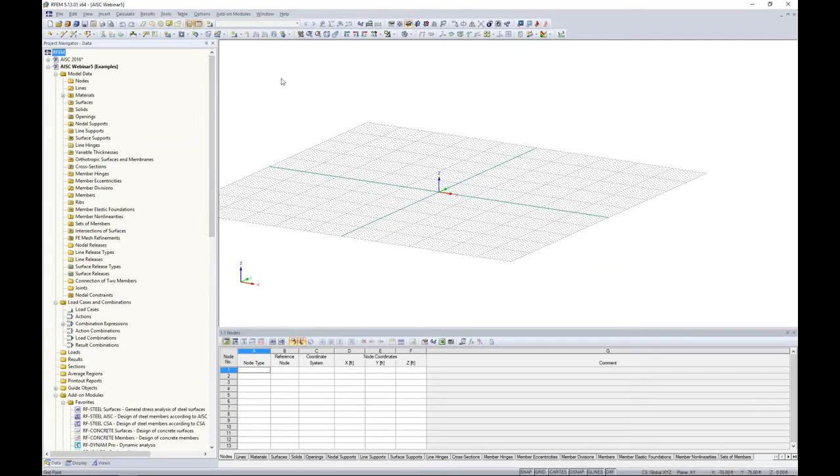So to begin with, we want to start off with drawing a truss. Now, we could normally go in and create our members individually, snapping to different points, but under Tools, Generate Model Members, we have several structure generators here: 2D frames, 2D trusses, 3D frames and trusses. We can even generate stairs. So we'll start off with a 2D truss.

And up pops our dialog box, and you'll notice that we have many different options when it comes to truss design. In addition, you can specify how the diagonals will be laid out, or our web members. So if we take a look at some of these different options, they will go ahead and update depending on which selection we've checked here. So we'll start off with this second selection, and our diagonals will be the default for this first selection.

The parameters is just our geometric information. The number of bays, we can set this as 6. The total length, which would be the span length, we'll set this as 50 feet. The total height is going to be measured right here at the center line. That can be set to 7 feet.

Now we have a couple other options here. We can lower the lower chord member here by a certain distance. For example, if we set this to 10 feet, you'll notice how this picture changes. Same goes for elevation. If we make some changes here, then our picture is updated for how our truss will be generated. So moving on, the cross sections and member types.

So we must define the cross sections for our chords, both upper and lower, as well as our diagonals and verticals, or our web members. The program's telling us that we need to create a new cross section. So for this, we will open up our cross section library. You can see here that we have many different cross sections. For today, we'll begin with the rolled sections, and in particular the HSS.

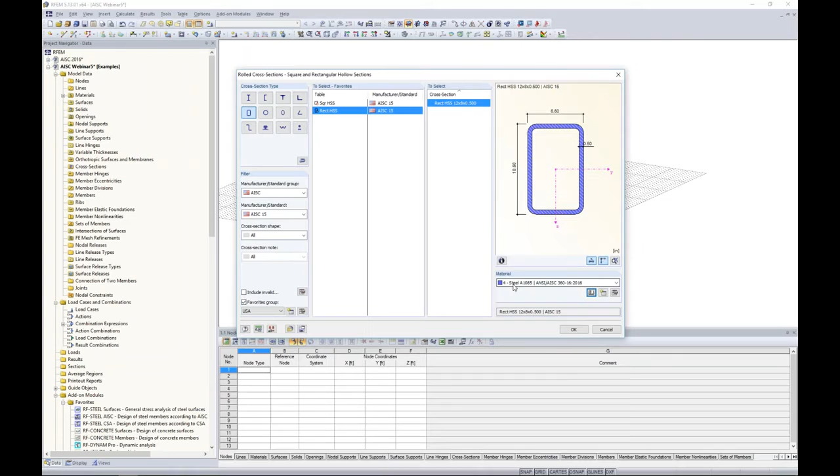So once I've created this material, I can choose it from my selection box here. We click OK, and we click OK once again. Now, that same material and cross section is populated for all of my members. Well, for the diagonals and verticals, I actually want to create a new cross section type, again under HSS, under my favorites group USA, and this time I want to choose a square HSS 5 by 5 by 0.375.

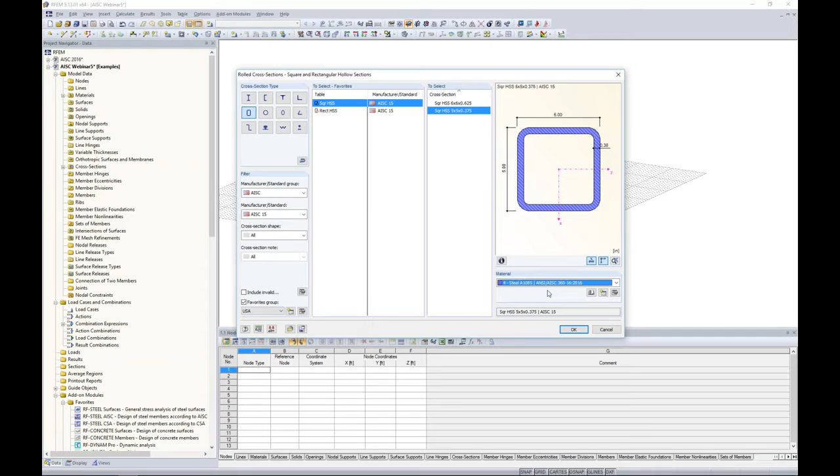I want to choose steel A1085 for my dropdown. You can see I accidentally entered it in twice here, no problem. We'll select the fourth material here, 1085. That will always be available now when I go to draw a new member because I've defined that material within this particular file. And I click OK.

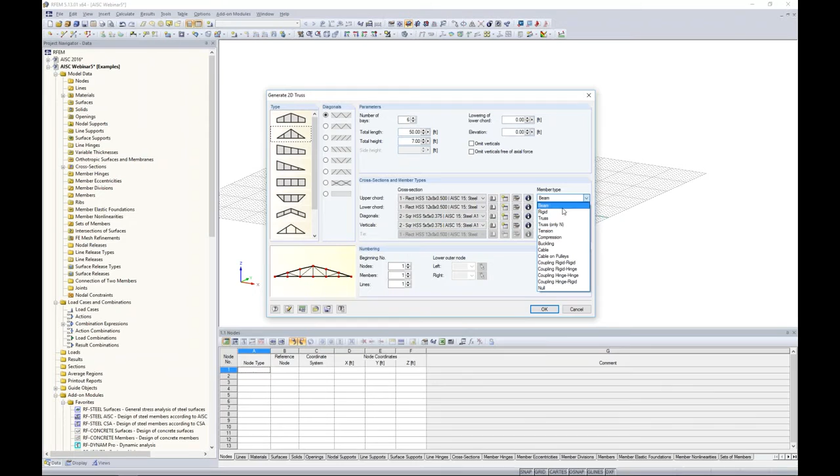For the verticals, we've already defined the 5 by 5, so now I can choose it from my drop-down box here as well. Regarding the member type, this is important because you can see here that we have many different members within RFEM. You can choose a beam member, a rigid, tension only, compression only, cables, because we are a nonlinear analysis program. So a beam member is going to be nothing special, just a typical beam or column.

But a truss member, which you can see the program automatically inputs here, is going to set a moment end release. So we're only transferring axial and shear forces. So that's just a quick application rather than manually applying those moment releases for our web members here. So once we're done, we can click OK.

And you'll notice that, as I said, our input material is listed here. The blue is what we're not using. So I input steel A1085 twice. All I need to do is to select that, hit the delete key, and now we only have one listing of 1085.

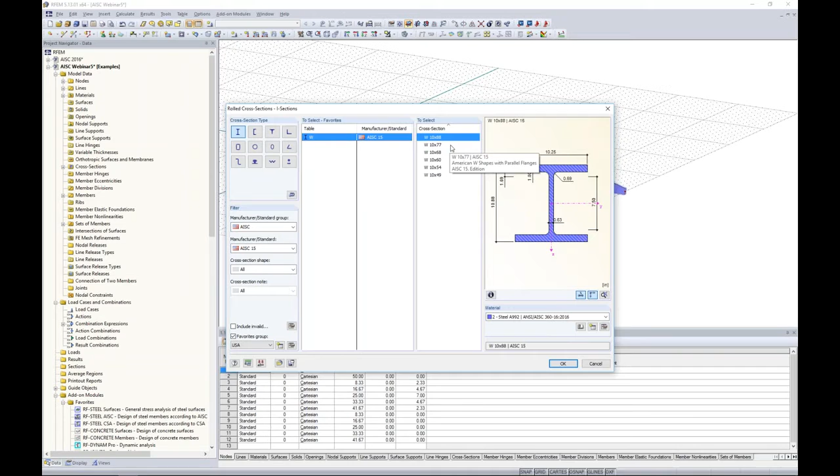Okay, so moving on to the columns, I'd like to just draw a member as we would within our toolbar, a new single member. I want to define a new cross-section type, and I'm going to choose my rolled hot sections, but a W shape here. And activating my favorites group down here with my checkbox, I've added in some W10 by members. So maybe I'm not totally sure which 10 by member I want to go with yet, so I'm going to select one of these sections from my favorites group. We'll start off with a 10 by 88.

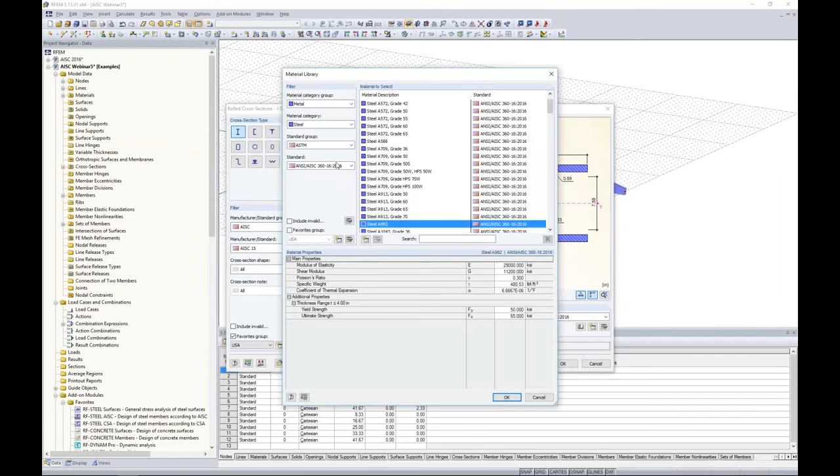Now, STEEL A992 is one of the defaults within the program. Currently it's set to the 2010 standard. At some point when the 2016 is more widely used, we'll transition to the 2016 STEEL A992 to be default. But for now, if you'd like, you can utilize this just for consistency to change this from the 2010 to the 2016. So STEEL A992, we'll click OK. The member hinges, we'll leave these as fully fixed. We'll see a little bit later on how to apply a moment end release.

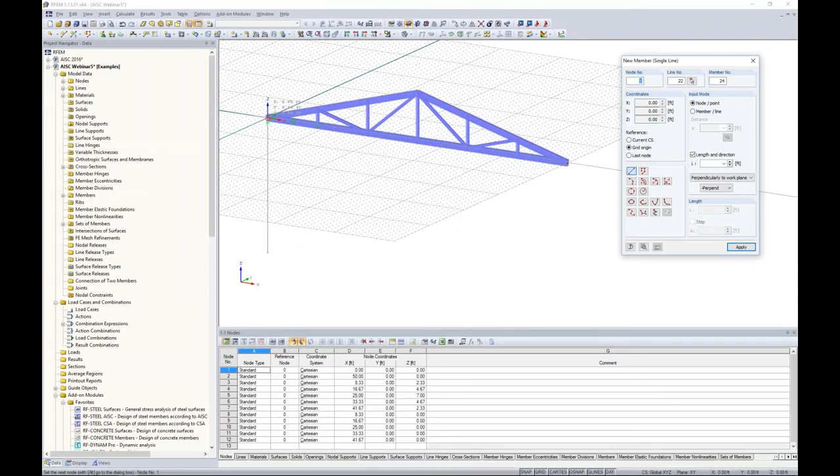I click OK. Now, typically, I could snap from one point to the other to create my columns, but we have a nice feature here where all I need to do is specify the length and direction. So I'm going to specify my columns at 20 feet in height, and I want to draw this column member perpendicular to my current work plane, which you can see here in the negative direction. So now when I just snap to the end nodes of my truss, I hit my right mouse key to escape, you can see that those columns were automatically drawn in the right magnitude and direction.

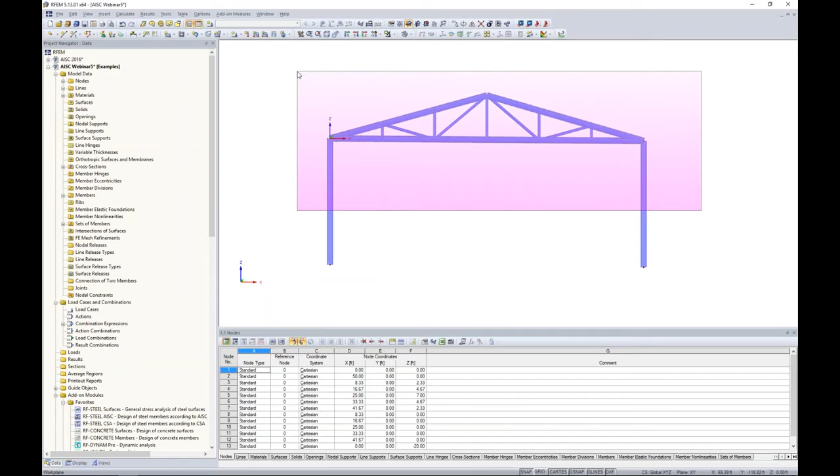Okay, so now that we have our first frame and truss drawn here, I'm going to use my selection box, and you'll notice that I'm paying careful attention to not select my nodes down at the bottom, and there's a reason for this. So just like in AutoCAD, with this selection box, we drag it over our frame, and I'm going to turn this into wireframe view and zoom in here. Holding down my control key, I'm going to unselect a couple of these nodes at either panel point on either side of the truss. Now you can't really tell graphically, but again, there's a reason why I'm doing that.

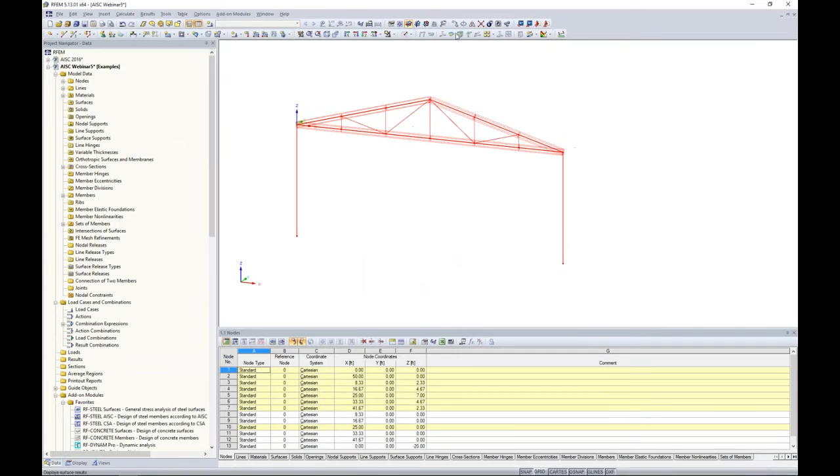So we're going to move on to the Move Copy tool. We're going to create 3 copies in the global Y direction of 20 feet. So Move Copy, nothing too special here. But under this option, Edit Expanded Settings, if we take a look at this, we can actually create lines between copied nodes. So this is why I was careful to highlight some nodes and not others. Now, even more so, we can assign a cross-section to those copied lines, or in other words, we're going to create members between the copied nodes.

Now, if you want to utilize one of the cross-sections already within the model, you can select it here from a template member, or we can access our cross-section database. This looks familiar from what we've seen before, and we can choose once again a new HSS member. This one will be a 6 by 6 by 0.625. From my drop-down, I can select my STEEL A1085 material. I click OK.

The member hinge, right now it's set to fully fixed, so that's what a beam type is. Now I could easily change this to a truss member if I'd like to release the moment by just simply changing the member type here, or you can always manually apply a member hinge. So by creating a new member hinge, you'll see here that we have 6 degrees of freedom, 3 degrees in translation, 3 in rotation. You can fully fix or fully release these. The program's making the assumption that you probably want to release the moment. We also have partial fixities with these spring constants.

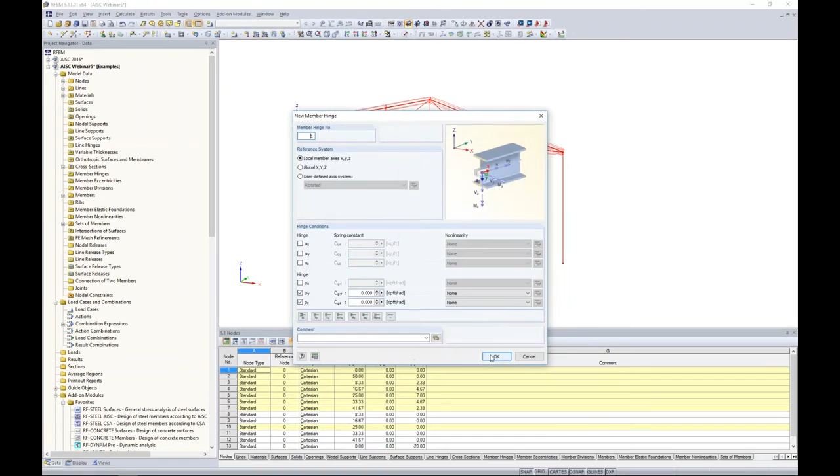For today, I just want to create a moment release. If I hit OK, that moment release will now be available. That's member hinge number 1, and I can select it from my dropdown for the member end as well. So I click OK through all of these dialog boxes.

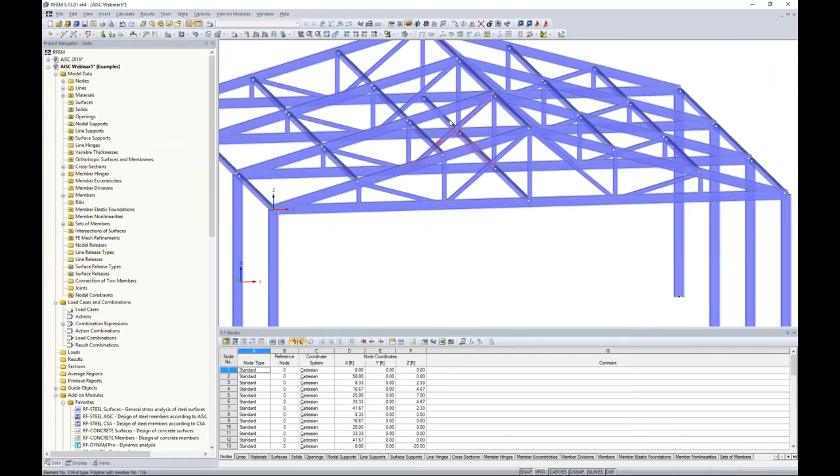You'll notice now that our structure was generated at the click of a button. Turning this into rendered view, these were the members created between my copy nodes. This is why I paid careful attention to select some nodes and not others. At the bottom chord, I don't have any lateral restraints except at the midpoint, where I left one HSS member bracing my bottom chord. That's really it as far as the geometry for our structure.

Now we want to support it. Up in our tools, we have a new nodal support. We also have a line support for maybe the bottom of a wall, and next to that, a surface support for, let's say, a slab on grade if we want to apply soil spring stiffness. For today, we're sticking with the new nodal support.

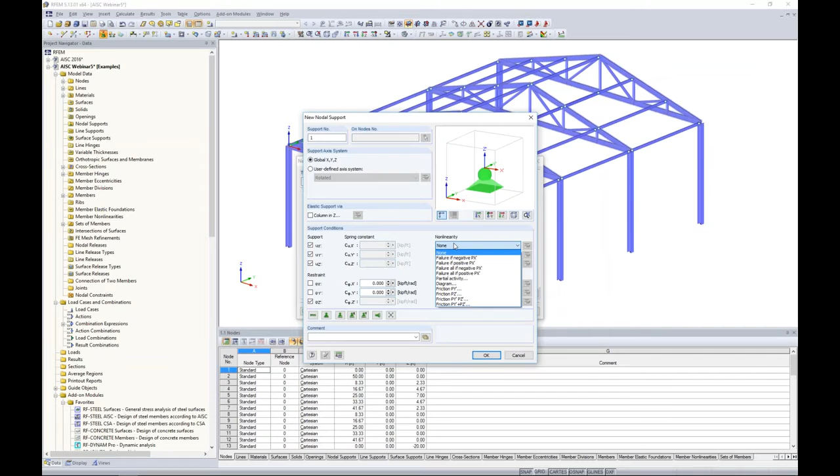We have some defaults here: hinged, rigid, fully fixed. We also have sliding. You can create your own nodal support definition, and this should look familiar—like our member end conditions. We have our 6 degrees of freedom, partial fixity, and nonlinearity to take into consideration if we'd like. Nonlinearity might be important for sliding or friction supports. For today, we will stick with one of the defaults, which is fully rigid.

I click OK. All I need to do is rotate my structure around here, select the bottom nodes, and my rigid supports are applied.

Now, if I think the supports are maybe a little too big for this structure, what's nice is that I can always right-click on these supports to decrease the size. Now you can see all of them are a bit smaller. The same thing goes for loads applied to our structure graphically as well, just something to point out there.

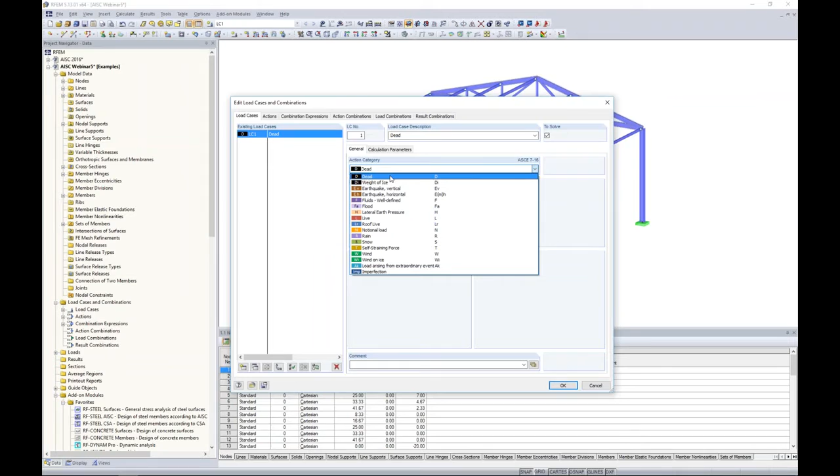Okay, so the geometry and the supports are completely done for our structure, so we want to move on to loading. For this, we want to create a new load case, available in our tools. The first load case description will be dead load, and the action category is set to dead. Action categories are important because the program needs to know what load factors to apply to which loads, based on the ASCE 7 2016.

The self-weight can automatically be accounted for within the dead load with this checkbox here—you can see -1 in the global Z direction, and our global coordinates are shown here. Creating a new load case, we'll call this one live. The action category will be set to live, and self-weight will be unchecked here.

For our third load case, we'll call this one wind 1, with the action category set to wind. For our fourth and final case, we can just make a copy of this and rename it to wind 2. Jumping to combination expressions, you can see the program is going to automatically create 2 expressions, LRFD and ASD.

Now, if we're curious to know what exactly the expressions are in relation to the code, we can click on this little info button here, and this will show us all of the ASD load combinations directly from the ASCE 7 2016 section 2.4.

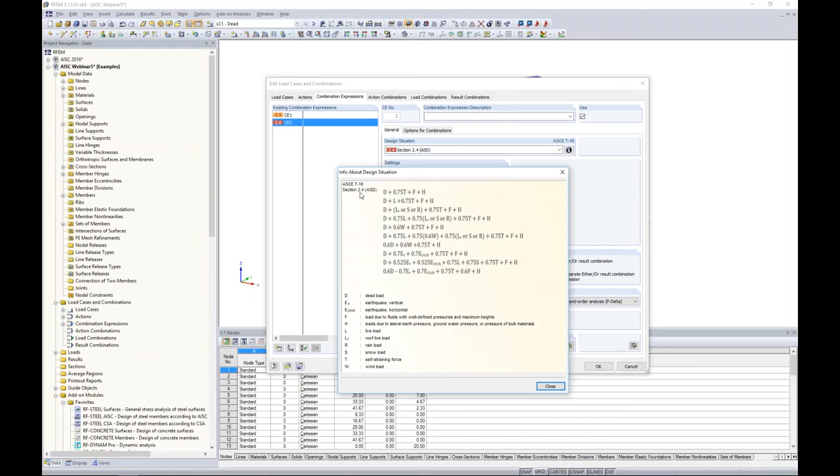To lay this out a bit more clearly, we're going to jump to the load combinations. These are the actual load combinations generated by the program for both LRFD and ASD, only applicable to the load cases we've defined—dead load, live load, wind 1, and wind 2. Lastly, we have our result combination, which is just an envelope solution.

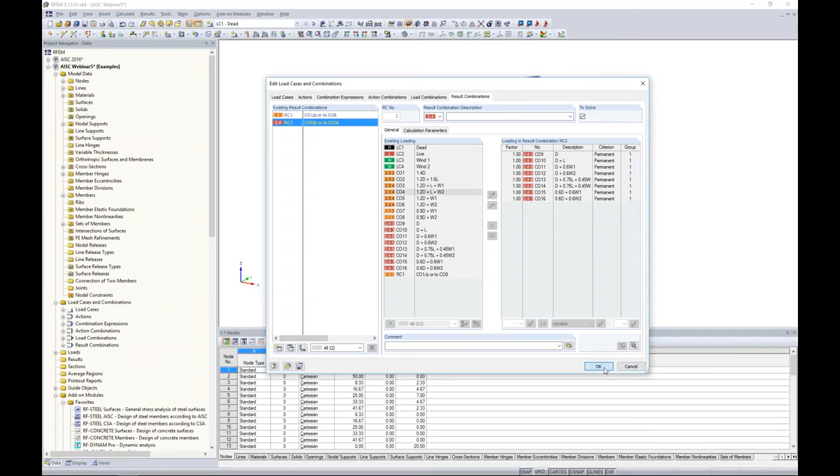So if we're looking for maybe the highest or the max or min forces on our structure, for all of the LRFD load combinations, we'd want to look at a result combination. We also have a result combination for ASD set here for maybe seeing what the worst case deflections are for all load combinations together. So once this is done, we click OK, and we're back in RFEM.

Now, utilizing this drop-down box, we want to make sure that we have the correct load case available here before we move on to applying loads to the member. Dead load, we're going to assume that just self-weight is fine for today's example. I'm not going to add on any other loads. So we'll scroll then to live load.

Now for live load, under tools, generate loads, we have the option here for area loads on members via a plane. The first thing that we want to define is the load magnitude in the global Z direction. The magnitude here will be -0.05 kips per square foot. Then we just need to graphically select our corner nodes.

So the first thing to select would be over on the left side of the structure. We're going to choose one plane here. Now I want to do the same thing on the right side of the structure, and what's nice is that I can do this all within one step. So now we have both planes defined on either side of the structure.

We can remove the influence from either single members by individually clicking them, or we can choose a reference member so that all members parallel to that reference member will be excluded from this load. So, for example, if I'd like to exclude these intermediate members between my top chords, all I need to do is just select one of them. All of them are now not selected to be considered for the load. I click OK, and we can see here that the load is now shown graphically.

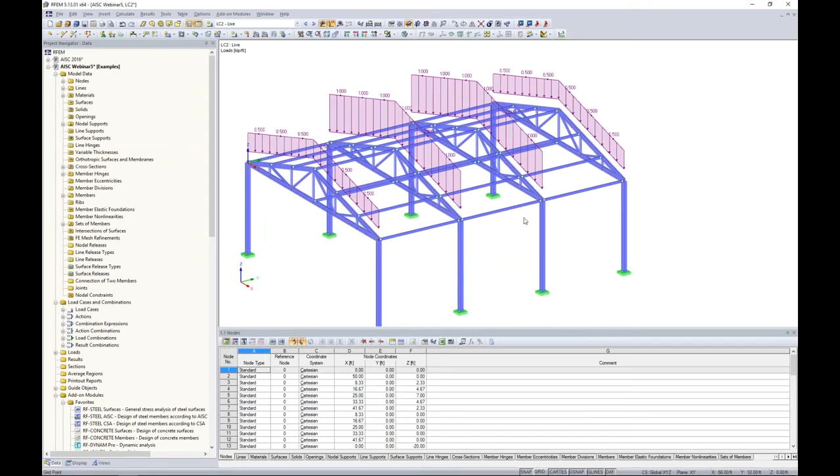Now, this is a pretty clean look, but if we're interested in how the load is being distributed to my members, I can right-click and display separately. So now we can see exactly what those member loads are based on their tributary area, and you'll notice that all of my intermediate HSS members were not taken into account.

Moving on to wind load. So for wind load, under tools again, we have generate loads from either snow loads or wind loads. For wind loads, we have vertical walls with roof according to the ASCE 7 2016. Now, same thing goes for snow load as well. The wind and snow load generators are for pretty general type structures like what we're utilizing today and what you see in this picture. Anything outside of these general structures will need to be accounted for by manually applying those loads.

So we want to put in here some velocity pressure and some other components that are important in terms of determining what the load should be according to the ASCE 7. We'll just go with the basic wind speed of 70 miles per hour. The building mean roof height, this can be set at 23.5 feet. The rest of the factors, we'll leave this as default.

So typically this would all be blank, empty, but the program remembers my settings from another model that I currently have open. So what I can do is just redefine the base geometry here, and we want to pay careful attention that we select it with how the program suggests here. So for example, the base geometry, I'm just going to select my 4 nodes at the base, and once I close this circuit, it will jump back to the dialog box.

And then for a dual pitch roof, I'm going to select my 6 nodes up here at the top of my roof. Now, if you incorrectly define this geometry in some way, the program will gray out the OK here, so you won't be able to apply the load, and you'll know that you did something wrong with selecting the geometry.

We can generate case 1 and case 3 from the ASCE 7. We also can take into account minimum wind loads from this standard. Now, for the sake of today's example, I'm just going to account for minimum wind loads in 2 directions. For the first direction, we can set this to that load case that we previously created, LC3, which was wind 1. For the second wind load case, we can just set this to LC4. Now, again, you can remove influence from single members here or members parallel to a reference member.

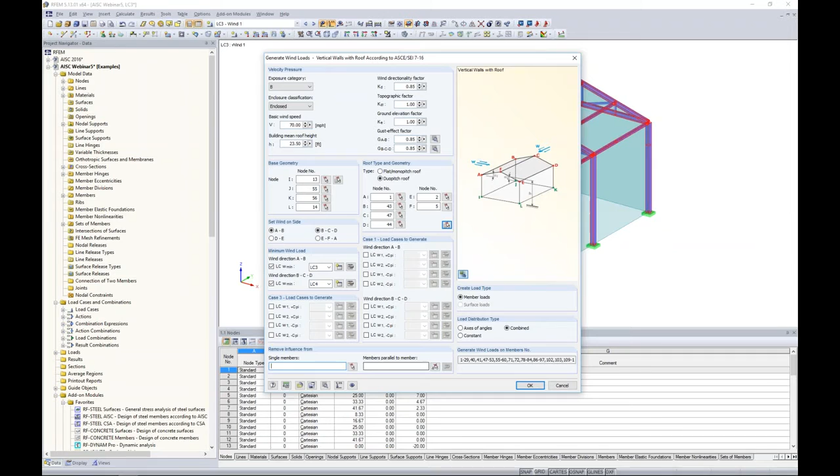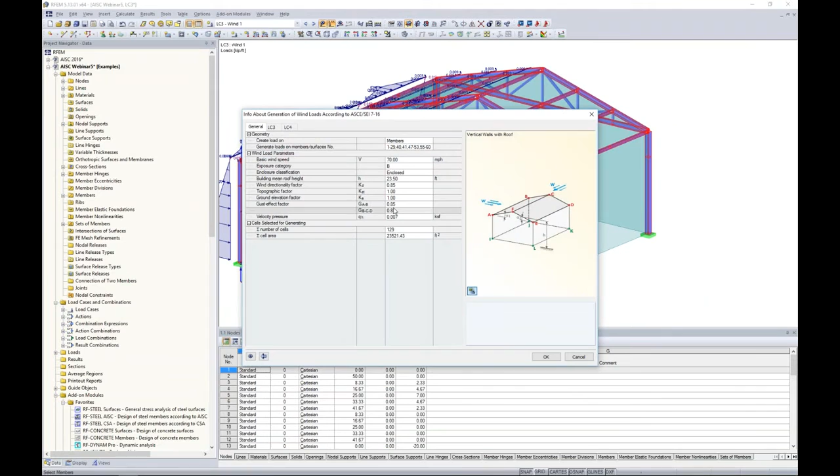For our case, if I graphically select my web members, maybe I don't want the wind load to be attributed to these web members with my truss. So I just graphically select all of them. You'll notice they're now not selected in red. I click OK, and now the program is going to give me some more information based on the calculations that were done.

I click OK, and now we can see these wind loads applied to the structure. This is for load case 3, and I can take a look at load case 4 from the other direction. Okay, so loading is complete. We can scroll through some of our load combinations to see how these are applied together. Not too many loads for today, but just know that loads can graphically be displayed here.

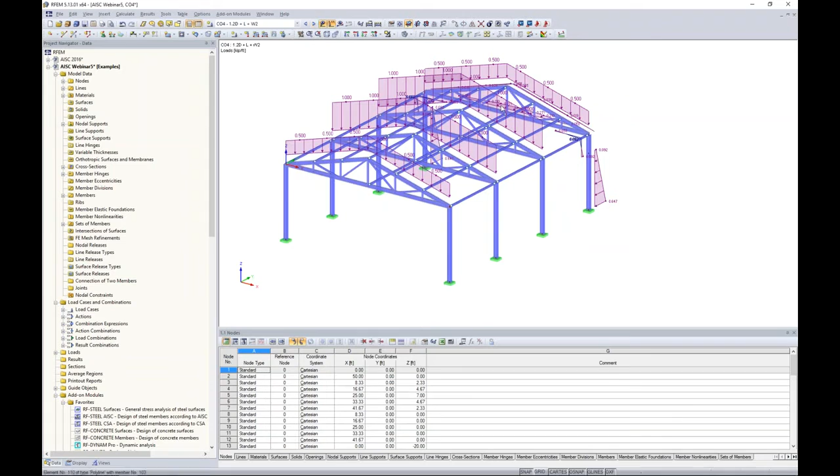So we're almost ready to run an analysis, but I do want to first jump back to the PowerPoint. In the 2016 edition, the direct analysis method is talked about in Chapter C. And within Chapter C, we have several stability requirements.

These would include member deformations, second order effects must be accounted for, such as P delta, P little delta, geometric imperfections, stiffness reduction, and uncertainty in stiffness and strength. For the sake of time today, we just don't have enough time to go through each one of these. But what I will say is that most of these didn't change. We'll go over what did change.

But I previously did a webinar on AISC 360 2010 steel member design in RFEM, with a recorded webinar available on our website and on our YouTube channel. What I did is I really went into detail on Chapter C to show you exactly how to take into account each one of these stability requirements within RFEM. So a very helpful webinar if you're looking at P delta, stability requirements in general, and how to apply that to the structure.

For today, though, what I do want to mention is just a change that was made in the 2016 to the adjustment of stiffness in section C2.3. Now, in the code, the AISC tells us that we must apply a 0.8 factor for axial and flexural stiffness. So it should be applied to all members that contribute to the lateral stability.

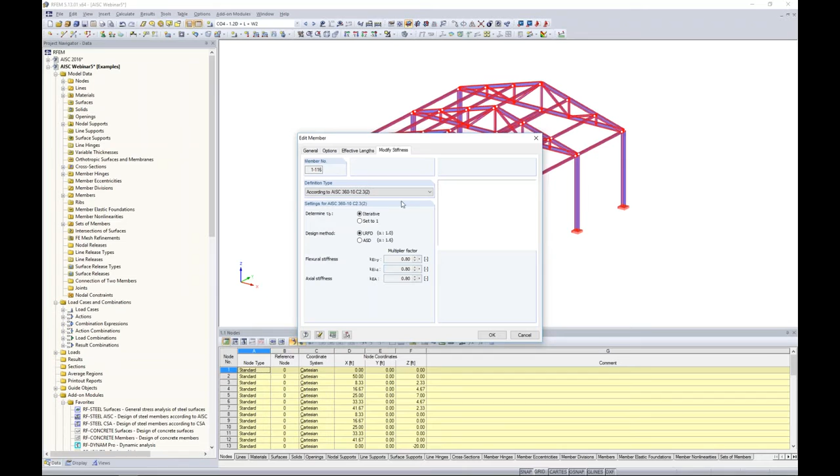Realistically, it's not too often that we're designing with slender members. It's definitely not unheard of, just not so common. So when you're not designing with slender members, nothing changes - you can continue to use the 2010 reference we've selected here. If you are designing with slender members, use this option for all the other members. For your slender members, you have two options: you can set this equal to 1 and apply additional notional loads, or you can choose the multiplication factors here to manually apply your reduction in stiffness to those slender members only. That's just something to keep in mind. Today we don't have any slender members, so we can keep everything as defined here.

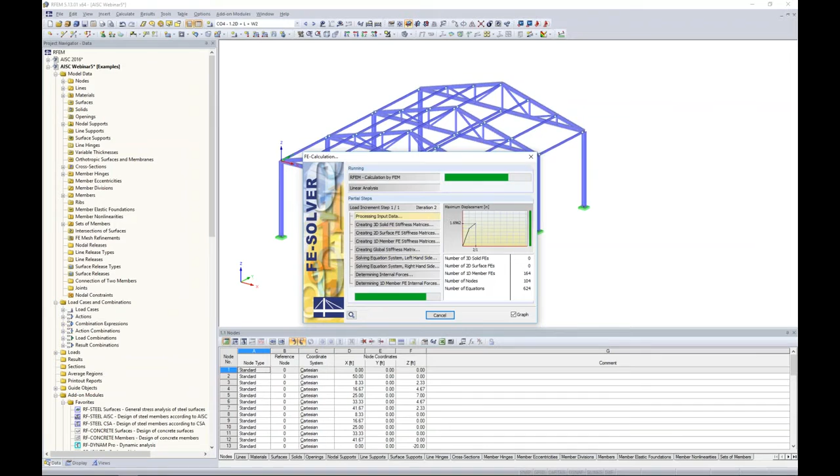Now we are ready to finally run our calculation. If I go to calculate all, the program is going to cycle through my load cases and load combinations. It is a nonlinear analysis - we are taking into account P-delta effects and that tau b stiffness reduction. Finally, we'll be presented with our analysis results within RFEM.

Once this is done, as I mentioned before, the Results tab is now available in our Project Navigator. The program immediately jumps to the deflections, so we can scroll through our load combinations to see how those deflections are changing based upon the different loads.

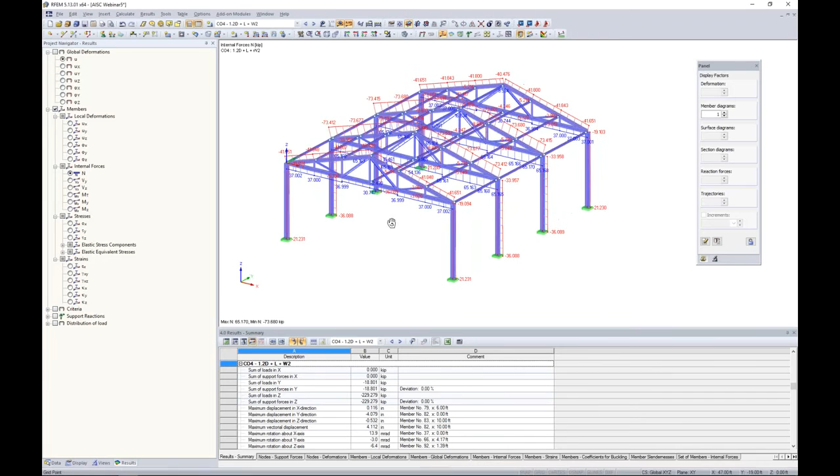We are also probably interested in the internal forces. I can expand this tree here, select members, and maybe take a look at my axial loads - all of the axial loads are presented to us here graphically. Remember, you have a lot of control over how you're viewing these results in the graphics window. Under the display, for example, there's this whole results section.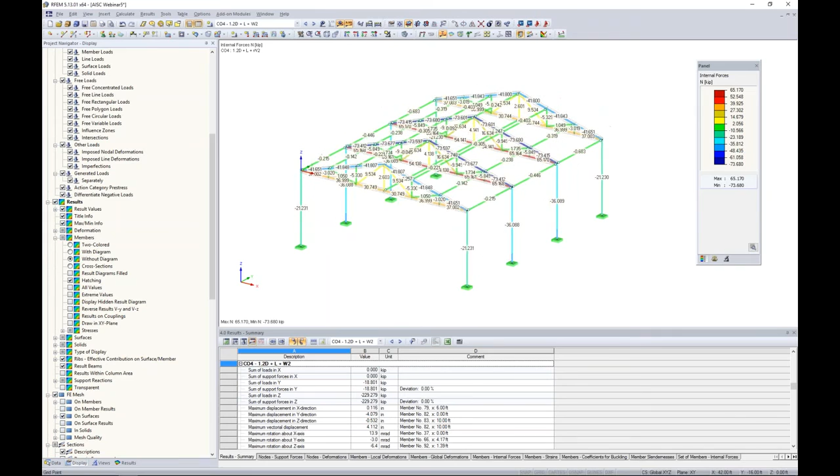Under members, if maybe we want to change this to a color diagram, we can - so now we have a colored panel. We can change this to more of a wireframe view with the values written on here, or we can render the cross sections with colors as well. So again, very flexible in how you view your results, and you do have a lot of power over that.

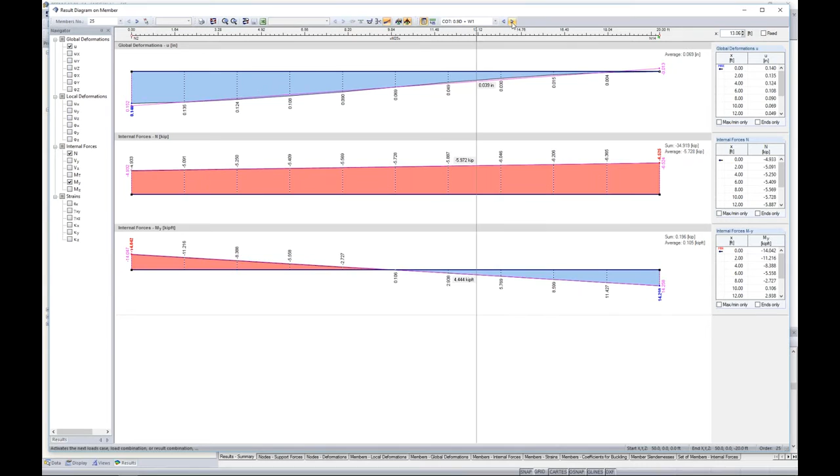For any individual member too, you can always right click and go to the results diagram. The results diagram is just going to give us a little bit more information for our various forces and deflections along the member length. We can even add and sum up these forces, average them out, add them to printout reports, and change the load cases and combinations here. So this is just a more detailed look about what's going on for that particular member.

Okay, so I think that concludes the analysis portion. I did want to mention support reactions, of course, are all available here. So I do want to move on now to the design.

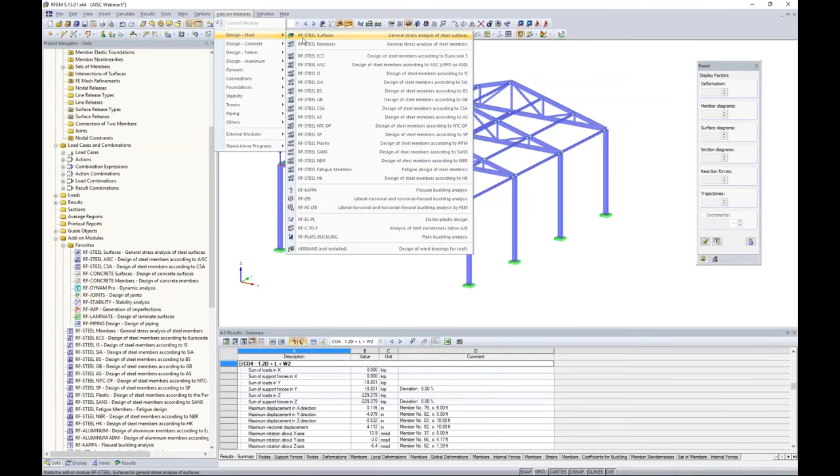I want to make the clear distinction that we are now entering into one of the add-on modules. The add-on module RF-STEEL AISC can be accessed here in our Project Navigator. You can always right-click on any one of these modules, select it as your favorite to move it up to the top of the list. Under the add-on modules drop-down box, we can access them here - they're categorized a little bit better according to the various materials and applications, and we can choose RF-STEEL AISC.

So up pops our add-on module. It's nothing more than a dialog box. I don't have to worry about remodeling anything, redefining cross-sections, materials - all those internal forces, everything is brought into this add-on module.

All that we're doing is defining a little bit more information that's relevant to the AISC specifically in order to get that unity check from the standard. So what I want to first start off with is I'm going to rename this case. I go to File, Rename Case, and we'll call this one Columns.

Now, by all means, you can design all members together in one case. If you like to keep them separate, such as columns, top chord, bottom chord, you can create different cases for them. So for this one, we'll start off with our columns. In the design, we have available here the 2016 edition, both LRFD and ASD. We also have the 2005 and 2010.

So sticking with the LRFD 2016, I want to select graphically my column members. So back in RFEM, I highlight these column members, I click OK. The ultimate limit state design, I must define which load combinations I'd like to consider. So I'm going to move all of my LRFD load combinations on the right side of this tab here.

As far as serviceability, I'm going to move all of my ASD load combinations because we can account for serviceability checks as well. Moving on down my list, my materials, steel A992 was automatically brought in. We don't need to do anything further here. Cross sections, same thing. W10x88 was brought in from RFEM, so we can continue to move on.

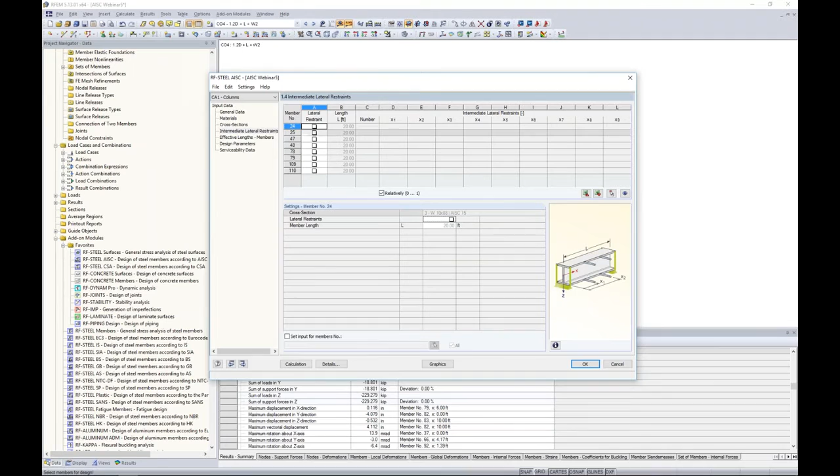Now, we don't have this consideration today for our columns. We'll assume that there's nothing bracing the top or bottom flange. Effective lengths is going to be our stability checks. We have our strong axis bending here, or buckling. We have our weak axis buckling, torsional buckling, and lateral torsional buckling.

Now, because we are designing these members per the direct analysis method in Chapter C, the code tells us that we can set the effective length factors equal to 1.0. This is in contrast to the effective length method in Appendix 7, where you do need to adjust those K factors. So moving on with Chapter C, then, we can leave these all as default as 1.

Now, the unbraced length is going to default to the full member length. Unbraced lengths are incredibly important because they really do affect our design. So the software is only as smart as what you model. Now, if we had some additional members in here that we would consider braced in either the strong or weak axis, we would want to adjust the unbraced length. And we'll actually do that with our next case later today.

For both strong and weak axis, I'm going to assume that it is the full length, the full 20 feet for my unbraced length for both buckling, torsional buckling, lateral torsional buckling. So we can move on.

The design parameters are going to be some additional variables. For example, our Cb factor, which we can see is default set to 1.0, which is a little bit more conservative. We can change this to equation F1-1, or you can manually override this. We also have some additional variables here. These are just important for some of the various equations in the AISC.

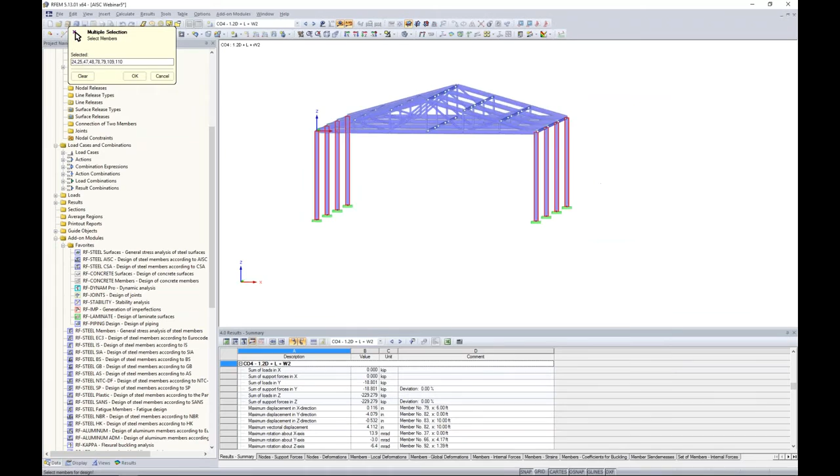Serviceability data—this is how we check our deflections. The first thing I want to do is choose member from my drop-down box, and then graphically go back into RFEM and select my columns. The reference length is again going to be the full length of the member, the 20 feet.

We can add in here a pre-camber if we had one for deflection considerations, and then the beam type needs to be set to beam or cantilever. So the question is, we've identified how we're going to compare these deflections, but what exactly is it going to be compared to? What is my limiting deflection ratio?

Under the Details tab, we have our serviceability input. You can see that the limiting deflection is set at L/360 for simply supported, L/180 for cantilevers. By all means, you can override this information as you see fit for your limiting deflection ratios.

The deformation is either relative to the shifted member ends or the undeformed system. With shifted member ends, the deflection is measured only from the new distorted shape of that member and its member ends, compared to the undeformed system, where deflection is measured from the original structure location before any loads are applied. That can give very different results, and it's up to you as an engineer which deformation you'd like to measure. We'll keep this first case as the shifted member ends.

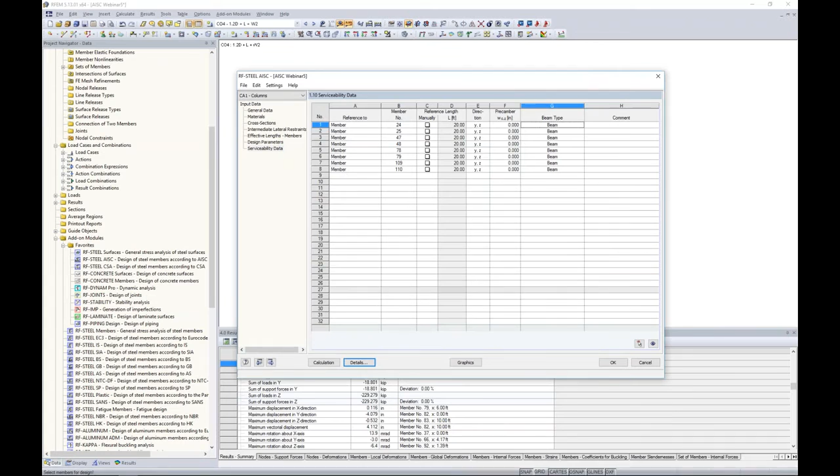I click OK, and I'm ready to run a calculation. Now you see that solves within a split second, and that's because we already have our internal forces from RFEM. All that we're doing is applying these equations from the AISC to give us our unity check.

Now our results tables are available to us. We can view design by load case, design by cross-section—we only have one cross-section available here—and design by member.

Keep in mind you can export all of this information directly to Microsoft Excel if you want to sort further. As I'm looking at design by member and scrolling down through this table, you'll notice that everything is synced up to RFEM in the background. With an extremely large structure, this is really beneficial to understand where exactly you're at.

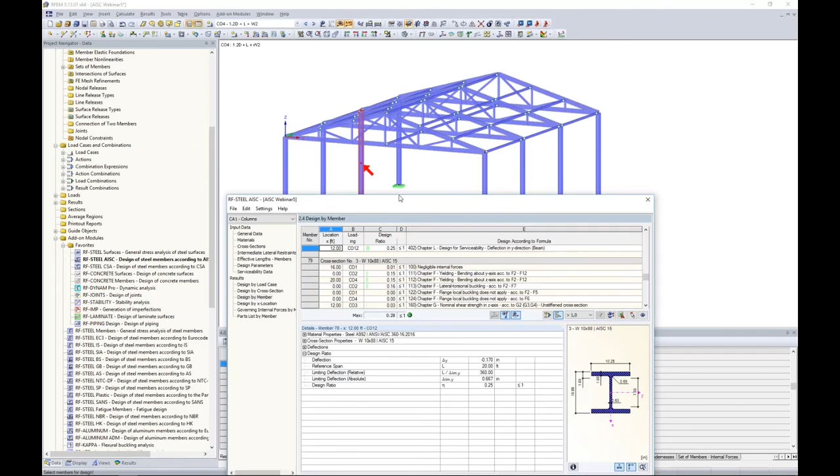Even more so, you'll see this big red arrow. That red arrow is pointing you to the location of the controlling internal force for that particular check. So if we're looking at member number 79, you can see we have all of the code checks for each chapter listed here—chapter F, chapter G, chapter E, and H.

For each one of these, if we go to lateral torsional buckling for example, you can see the cross-section type listed here and how it's classified—whether that's non-slender, slender, compact, non-compact. We have all of the variables that go into determining what that lateral torsional buckling unity check is, along with the code references. So it's very clear in understanding where the program came up with its numbers.

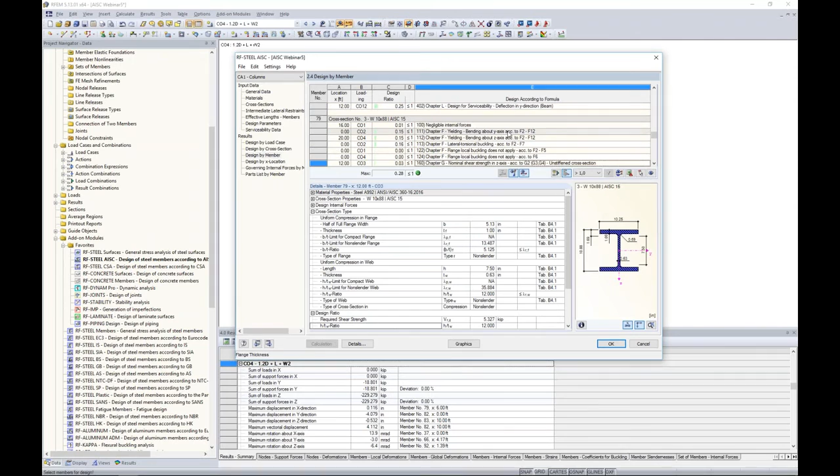It's definitely not a black box. Now, this is great, but you might say, gosh, that's just really too much information—I'm only interested in the controlling single code check for each member. Well, that's fine. You can easily filter here according to the max.

Once I hit this filter button, it's only going to give me my controlling equations, which you can see—serviceability, for example, controls with a lot of these, chapter H for member number 109. So that way you're not filtering through all of the code checks. We also have the material takeoff available here.

Now, going to the graphics view, this is going to display our results. We're still technically in the add-on module RF-STEEL AISC, but we're viewing everything back in RFEM. With this drop-down box, you can see RF-STEEL AISC is selected, and we can take a look at our ultimate limit state design—just taking a look at those code checks.

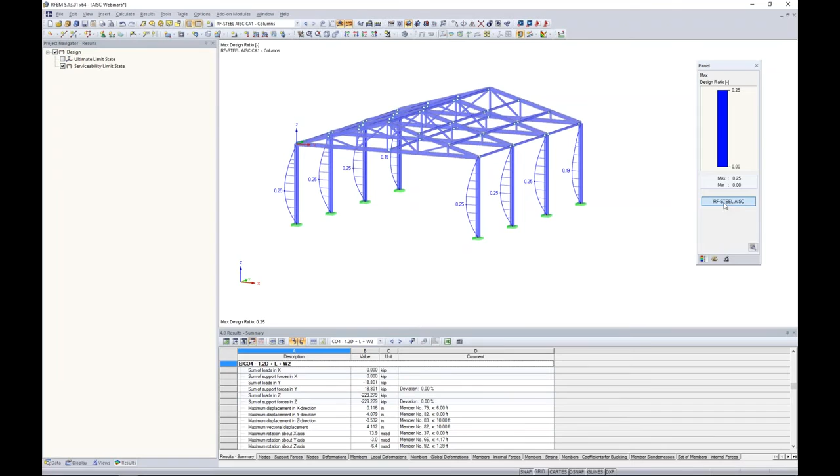We can also take a look at serviceability, which it looks like most are 0.25, for example, and controlling at the midspan. So jumping back to RF-STEEL AISC, that really shows you the results for just our columns designing our members.

Real quickly, I just want to mention optimization. Back under the cross sections, you can see here that the W10x88 has our max design ratio listed here after we solve for it, 0.28.

Now, we can optimize. The default is set to no, but we choose this drop-down box and we have a couple options here. You can optimize from the current row, meaning the program is going to choose any W shape from the AISC section.

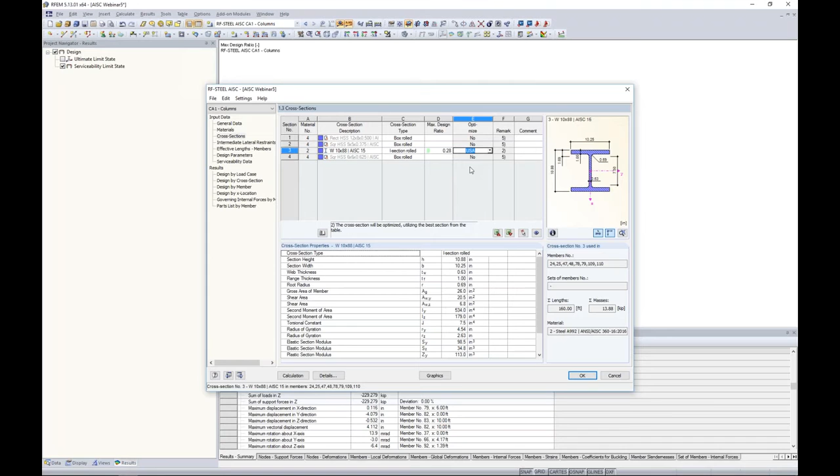The other option is to choose one of your favorites list. So remember way back when we first drew this column, I had my favorites list USA with about, I don't know, 7 10-by shapes. So with this favorites USA now, if I want to optimize from just those 10 or so shapes, those W10-bys, then I can choose this option. I can hit calculate.

Now what the program is going to do is it's going to kind of give you an estimation based on the old internal forces with the old cross section and say, well, I think approximately you should get about 0.54. So, you know, that's a little bit better than 0.28 or whatever we were seeing before. But you'll notice here that this is highlighted in blue, and this is telling you the cross section in RFEM is different from the cross section in this module.

So what you need to do is to right click and export this cross section back out to RFEM, rerun your analysis so that we get the true internal forces based on the correct stiffness with our new shape. What it's showing now is just an approximation. That's why it's highlighted in blue. In turn, I can right click and import the cross section from RFEM to bring back in that W10x88. So that's what I want to show you for this first case and design of columns.

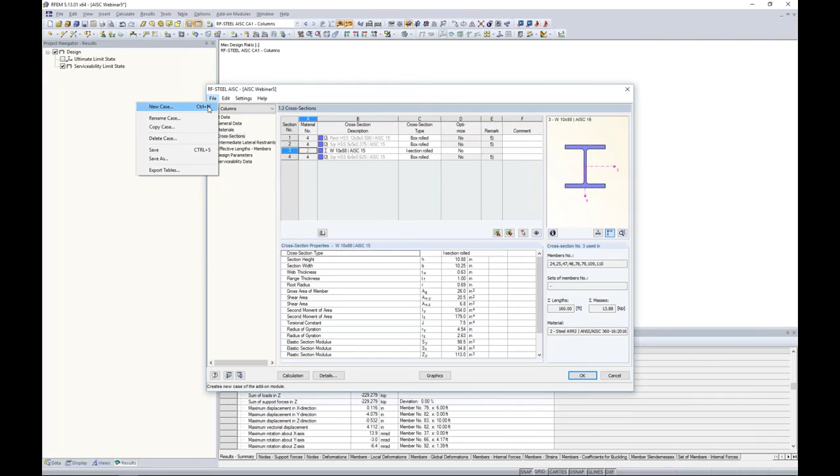Next, I'd like to create a second case. So we'll go to File, New Case, and this one we will call Bottom Chord. I click OK. It's asking me to save changes to my original case. That's fine. So now you can see I can easily toggle back and forth between either case. So that's why sometimes it's nice to keep them in separate cases if you want to design sets of members separately. So for this next case, what I'd like to go into a little bit more detail is the design of members versus sets of members.

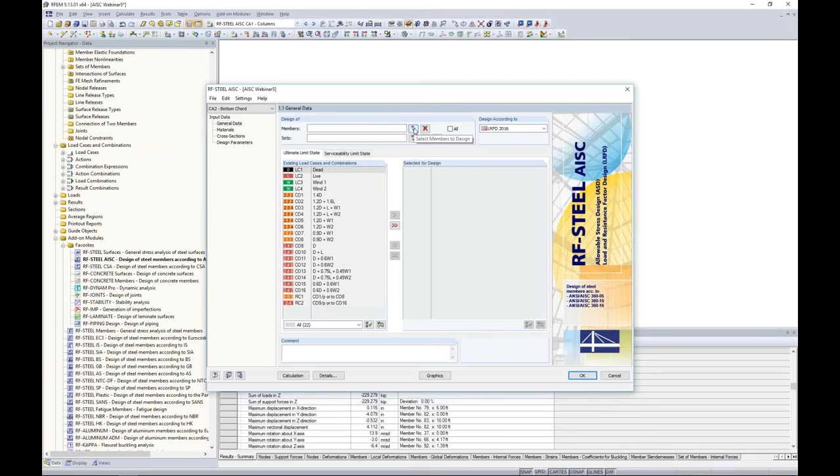Now, ultimately, we're going to end up with the same results for members versus sets of members. It's just a different approach, and I think that there are some advantages to sets of members over members. So what we'd like to first define here, LRFD 2016, that's fine. And I'm going to select here, rotate my model. I'm going to zoom in and select my individual members for my bottom chord at this second frame. Oops, not that member. And I click OK.

In turn, I'm going to select a set of members. So a set of members was automatically created by the program when I generated these truss members. You can see here there's a faint dotted line around all of my bottom members for this bottom chord. That's called a set of members. I select it, I click OK.

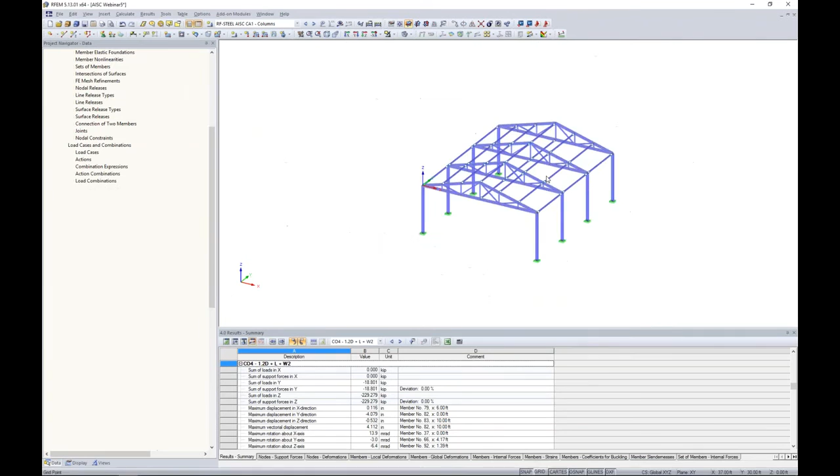Let me quickly jump back to RFEM to explain what a set of members is further. So the program automatically created those sets of members, that was done for both the bottom chord and the top chord. So if I zoom in here, here's this faint dotted line around the bottom chord. Now the top chord, if I highlight this faint dotted line and select it, is the entire top chord. So this can actually be designed as one continuous member.

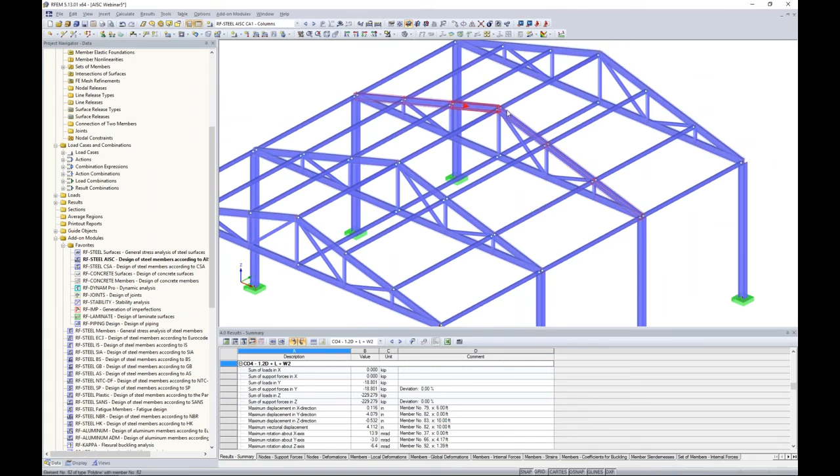Now, what's very powerful about sets of members is it doesn't necessarily have to be in a straight line. So it does need to be in a single plane though, but it can have several bends to it. A great example, of course, is this top chord, but we could even design this column, this top chord, and this other column as one continuous member if we wanted to with a set of members. Now, the program automatically did that for us.

Just to let you know, you can hold down your control key, select several members, right-click, choose the option Create Set of Members, and that's how we can generate a continuous member here with that dotted line around all of them. So we're not doing that with these members, but jumping back to my current module here, which is the RF-STEEL AISC, and my bottom chord, that's kind of the difference in selecting members versus sets of members.

So again, I want to choose my LRFD load combinations for ultimate limit state design. Serviceability, we will choose our ASD load combinations. Moving on down the list to materials. So we had chosen Steel A1085 for HSS members.

Now, this is now recognized in the 2016 spec as an approved HSS material, as I mentioned before. Now, with A1085 and A1065, these have more stringent wall tolerances than the previous A500. So what this means is that the code tells us we can now use the full nominal wall thickness for design. This is in comparison to the A500, where we had to use 93% of the thickness.

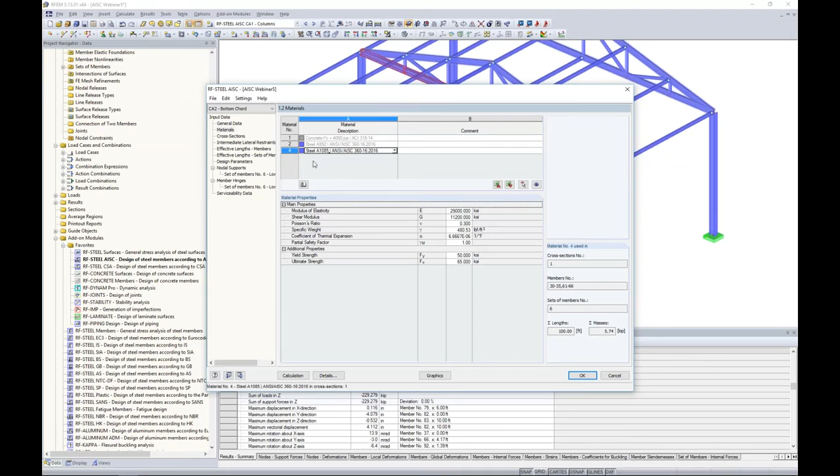So how do we account for the full nominal thickness with this new material? Under the Details tab, you'll see here a section, Design Wall Thickness of HSS. Here is where we can uncheck this option so that we don't reduce the nominal thickness for HSS according to B4.2. So when using the A1085 or A1065, we can account for the full thickness.

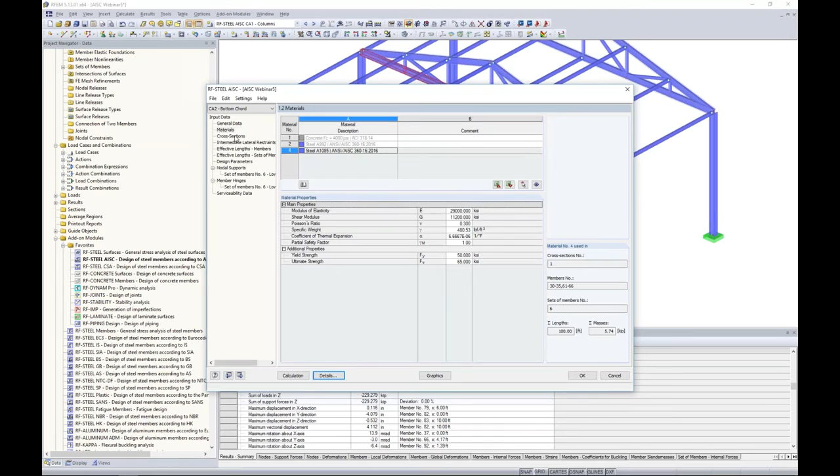Cross sections, HSS 12 by 8, brought in from RFEM. Intermediate lateral restraints, same concept as before for both our members and sets of members. Now we don't have any top or bottom restraints here for HSS members. It's just not relevant, so we will continue to move on. So effective lengths for members, we also have effective lengths for sets of members. So we have two separate tables here.

So looking at our members, you'll see that the buckling length for strong axis, weak axis, and both torsional buckling and lateral torsional buckling are set to 8.33. This is incorrect. Again, the program only knows how the information is input into the model. So this is why it's incredibly important to pay attention to unbraced lengths. I would argue that for this bottom chord, the unbraced length for the strong axis is the full 50 feet. I don't have any columns bracing the member below it, so I'd like to account for that full length.

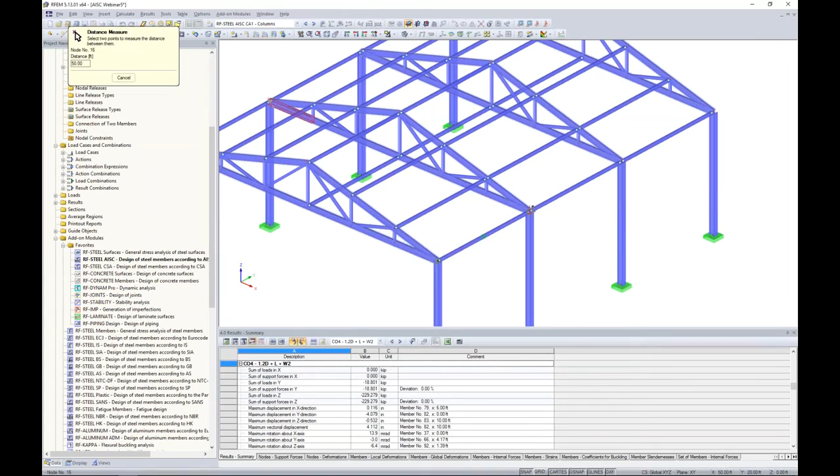Well, what I can do is to graphically measure the full 50 feet here from end node to end node. The program will calculate that as 50 feet. I can scroll down to my next cell and hit the F8 key to copy that input for every single member. Now, for my weak axis direction, I would say that this is most likely 25 feet.

Remember that we left in this intermediate HSS member bracing it in the weak axis direction at the midpoint. So again, we can use our measure tool here from one end node to the center. That populates as 25 feet. Using my F8 key, I can then enter that information for all of those members.

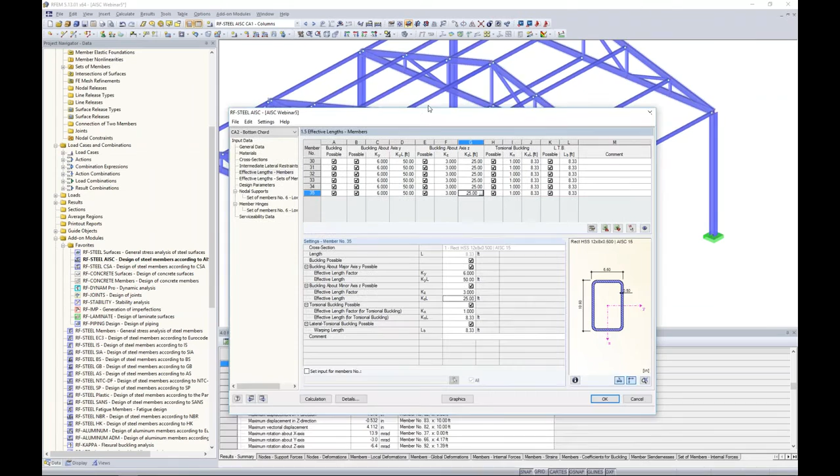Now, as for torsional buckling and lateral torsional buckling, again, this depends on your connection types, so it's really up to the engineer's discretion. I might say in this type of scenario that this small HSS member is bracing it for both torsional buckling and lateral torsional buckling as well. So what I can do, just like in Microsoft Excel, is highlight all these cells, hit Control C, and Control V to paste them into the adjacent cells. Same goes for lateral torsional buckling.

So now that we have set all the unbraced lengths for our members, we want to move on and do the same thing for sets of members. Now we have one single set of members listed, and the program defaults to the full 50 feet in length. We can manually override this, but what I'd like to do is jump down to the nodal supports here. This was not available previously with just members; it's only available with sets of members. And this is where a big difference comes in for members versus sets of members.

With a set of members, because we don't require it to be in a continuous straight line, the program will actually run an internal eigenvalue analysis for this single set of members. This will in turn come up with the buckling modes for that particular set of members and a critical buckling moment. So instead of weak axis buckling, strong axis, torsional buckling, lateral torsional buckling, we're going to forego all that for sets of members according to the AISC, and instead run an eigenvalue analysis, which is a much more theoretical approach, to come up with a critical buckling moment to take the place of that. So it's just more accurate.

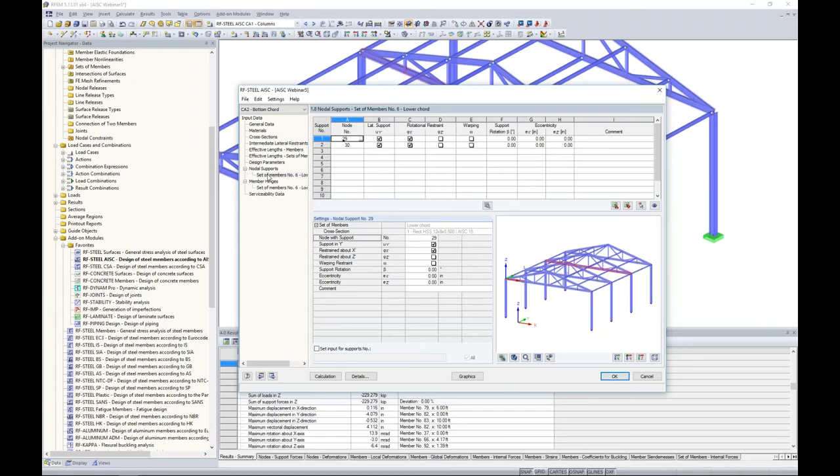So for this, with our nodal supports, you can see here our set of members is highlighted. I can zoom in here and change this to my local coordinate system. So for my eigenvalue analysis, the program has to support these members internally for this quick little side analysis to determine what our critical buckling moment is.

It automatically places these supports at either end. Each node along the set of members length has 4 degrees of freedom: lateral translation, you can see here, and we also have some rotational restraint. We can even take into account warping. For example, if you have warping, we can check this checkbox, go into the details here, and account for warp stiffening such as an end plate.

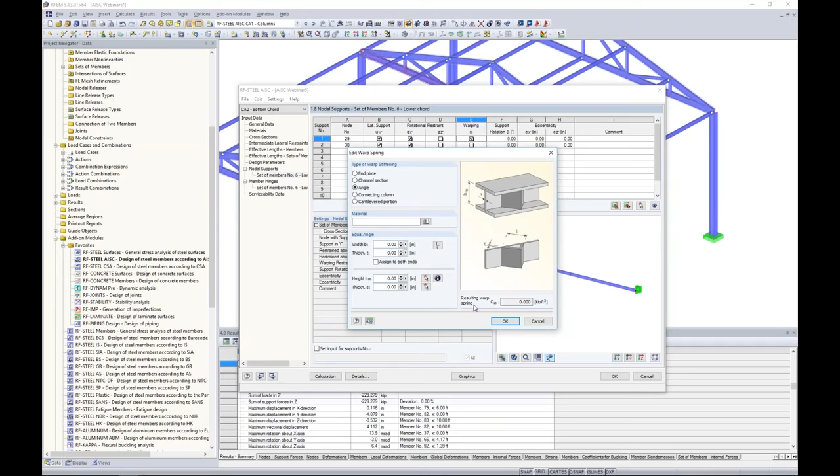Maybe you have a channel section or an angle. We just specify the material here, we specify the geometry of the warp stiffening, and the program will calculate a resulting warping spring. So I click OK out of this, and what will happen is we'll get a warping spring here that will automatically be accounted for within the eigenvalue analysis to give us a higher critical buckling moment. So pretty powerful that, for sets of members, versus what we don't have for members.

Now, for this particular set of members, remember we have an intermediate HSS framing into it. So what I can do is just graphically select that node back in RFEM. I do want to brace it laterally, and I want to apply a rotational restraint. Now, each one of these has its own local axes as well, X prime, Z prime, Y prime, which are mentioned here.

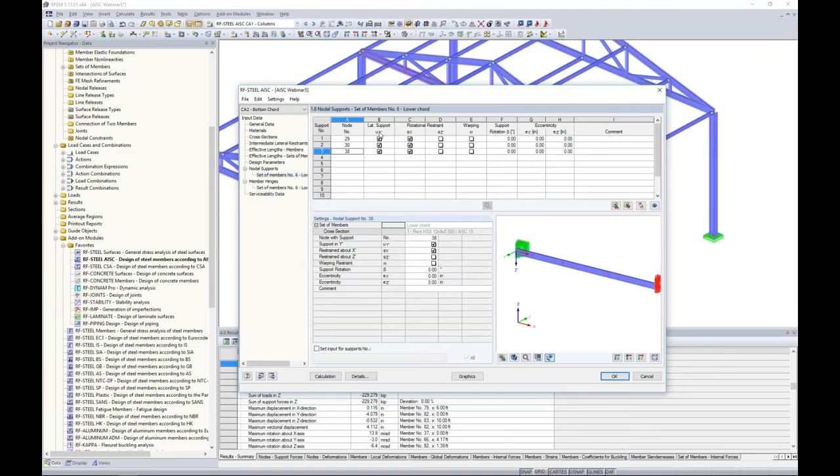Member hinges, same type of concept. If you had any member hinges along the member length, such as shear releases, moment releases, warping releases, you can account for them here, which will affect our eigenvalue analysis.

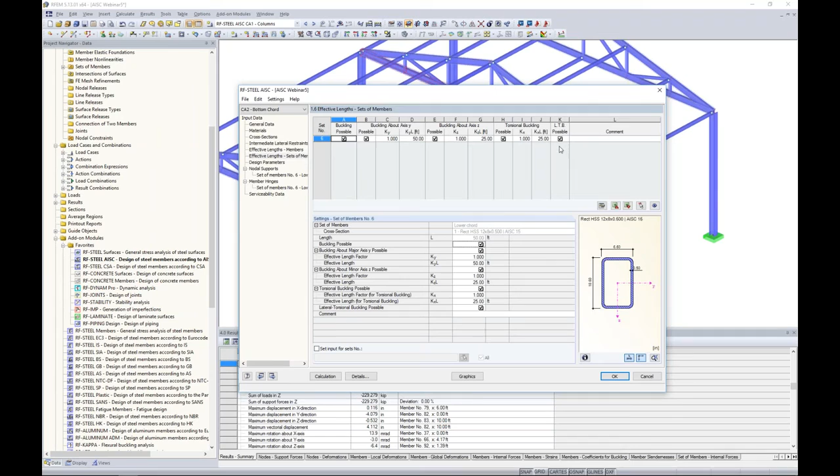So jumping back up to the effective lengths for sets of members, you can see now the buckling about the weak axis was automatically updated to 25 feet. Torsional buckling, 25 feet. Lateral torsional buckling will be automatically calculated based on the eigenvalue analysis.

Design parameters, nothing new here. These are just these various variables that go into play for our equations.

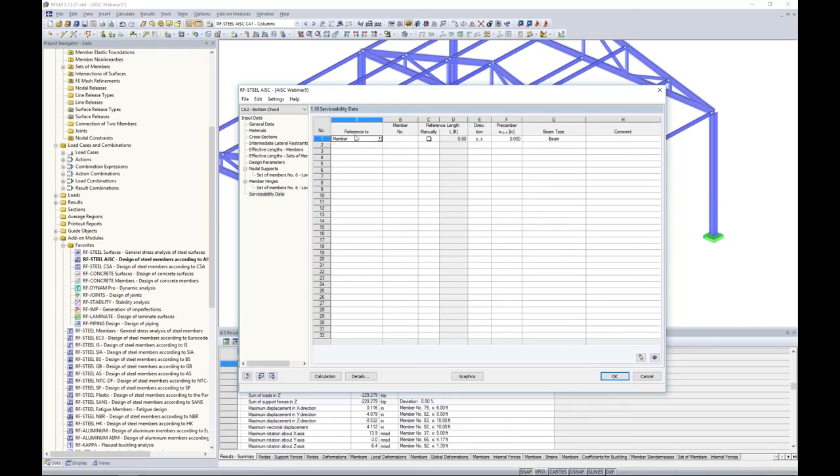Lastly, serviceability data. The question here is we want to compare serviceability for both our members and sets of members. The first thing we want to do here is choose member, and then we can graphically select those bottom chord members just as we previously had done to check the serviceability. I click OK. Now the reference length is set to 8.33.

We actually want to override this here and set this to the full 50 feet. Now again, I can just simply measure back in RFEM at the click of 2 buttons. I hit my F8 key, and now that will set the reference length to the full 50 feet for each one of these members.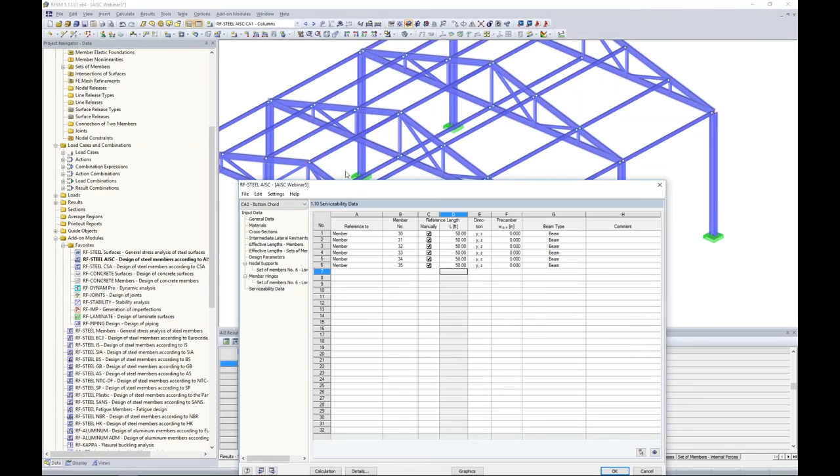For my set of members, I'm going to choose that from my drop-down box and graphically choose my set of members. I click OK. This is set to 50 feet by default, so that's great. So now we're kind of comparing the same thing here. We should come up with the same serviceability check.

But the one thing we do need to do under the details button is change this option here, the deformation relative. We cannot use the shifted member ends. That's just not comparing apples to apples. We have to use the undeformed system, otherwise we're going to get extremely different results. So in order to compare sets of members versus members, we have to compare that to the undeformed system, and I click OK. So now I'm ready to run my calculation.

Again, it solves within a quick second, and you'll notice here that I have my results available according to the load case, according to the cross-section, which we only designed for one cross-section, but we also have design by sets of members and design by member. So two separate tables there. If we're looking at design by member, we already went over most of this, but I did want to show you, if we take a look at one of these HSS members, is this section here, lateral torsional buckling.

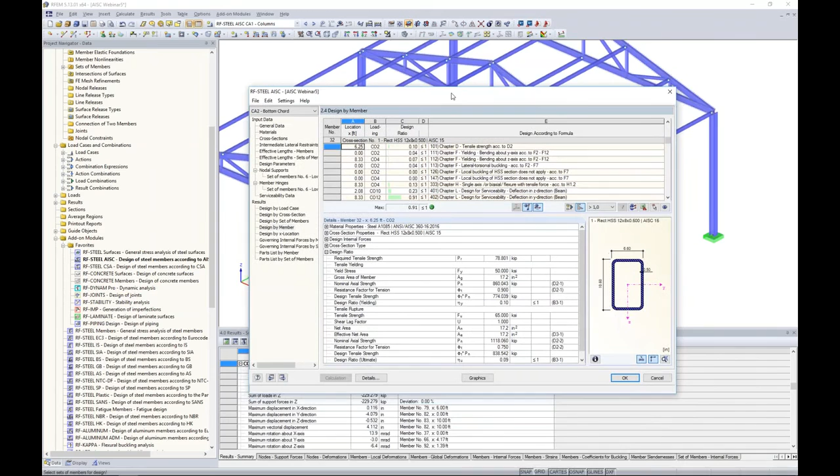For this is a brand new section to the 2016 edition for HSS members. So let's jump back to the PowerPoint to discuss that a little bit further.

So this is under the section HSS, lateral torsional buckling, section F7.4. LTB considerations were added here, which is new to the 2016 standard. They are dependent on unbraced lengths. So this includes the manual unbraced lengths that we entered in, our L sub B, and then L sub P and L sub R are our limiting bracing lengths, which are calculated according to our cross section. Now, depending on where you fall within that range, that's where your nominal flexural strength is going to be calculated, and it could vary depending on where you fall.

What's really great about RFEM is that not only have we added this section per the 2016 code, but we also give you all of this information such as Lb, Lp, and Lr, so you can find out exactly where you fall within this range. Then we're given our nominal flexural strength, Mn, according to F7-10, which correlates back to the standard. The code has a user's note saying lateral torsional buckling probably won't control in most cases for HSS. Realistically, deflection will usually control, and that's the case with our model today. Lateral torsional buckling is really low, and serviceability is a much higher code check. Just something interesting there.

Going back to the model, we can see here again that lateral torsional buckling. Now, if I go to my sets of members, and we only design for one set of members, I don't see lateral torsional buckling here.

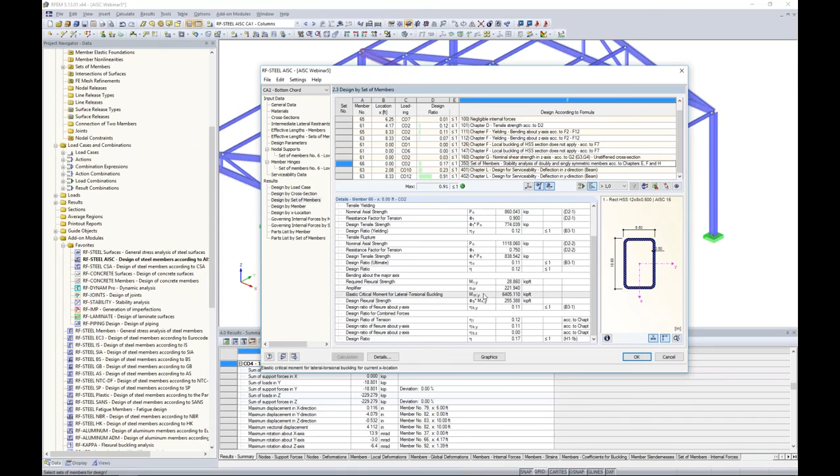That's simply because we forego those analytical equations from the AISC, and instead, under stability analysis, we run our eigenvalue analysis to come up with the elastic critical moment for lateral torsional buckling. You can see the amplifier determined from that, and we come up with 6,400 kip-feet, which is incredibly high, but that's what our stability checks are compared to. In reality, what ends up controlling in this case would be yielding from our strong axis, which is 255 kip-feet. But that is a huge difference between sets of members versus members, so something to keep in consideration there.

Again, all the code references are listed here. So we can take a look at the various code checks in our table. I think we see members versus sets of members, and we do get the same code check.

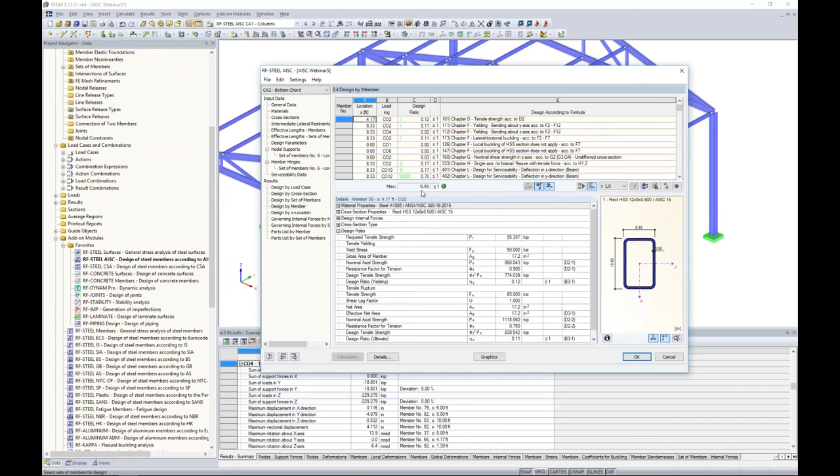What we can also do is view the information graphically. I think this is a little easier to compare to make sure we are getting the same results. So I'm going to highlight those bottom chords by holding down my control key. Maybe I create up here in my tools a visibility by selected objects, so we can clearly lay this out. This looks like our serviceability limit state design according to our AISC module, and the results are identical, which is exactly what we would expect.

Same thing goes for the ultimate limit state. We can see here we have the same numbers along the length for both bottom chords. Again, different approaches, but you should come up with the same results. But you have to pay very careful attention to things like unbraced lengths.

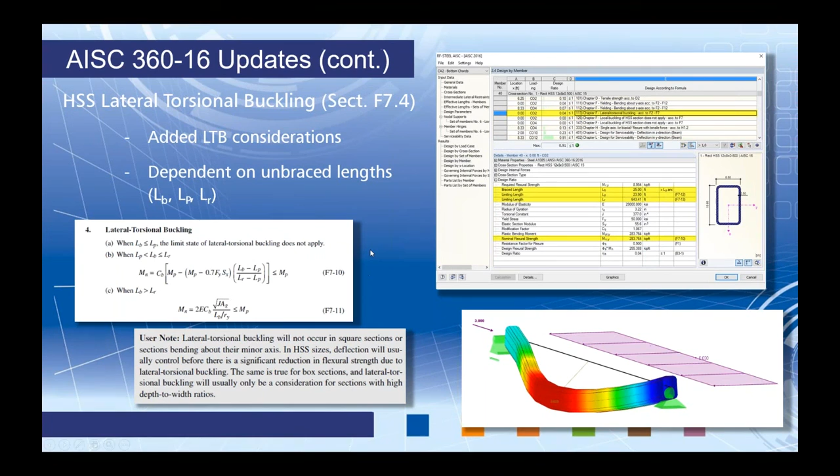That really concludes our structure today, but there are several more points I wanted to go over according to the 2016 updates that we just don't have members available for in our structure today. So this is definitely not an exhaustive list, but I wanted to point out some of the changes you'll see within the RFEM module RF-STEEL AISC in reference to the 2016 edition.

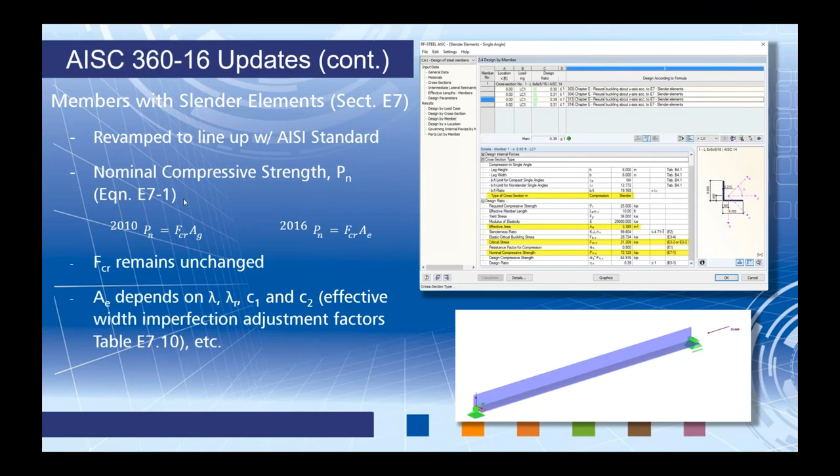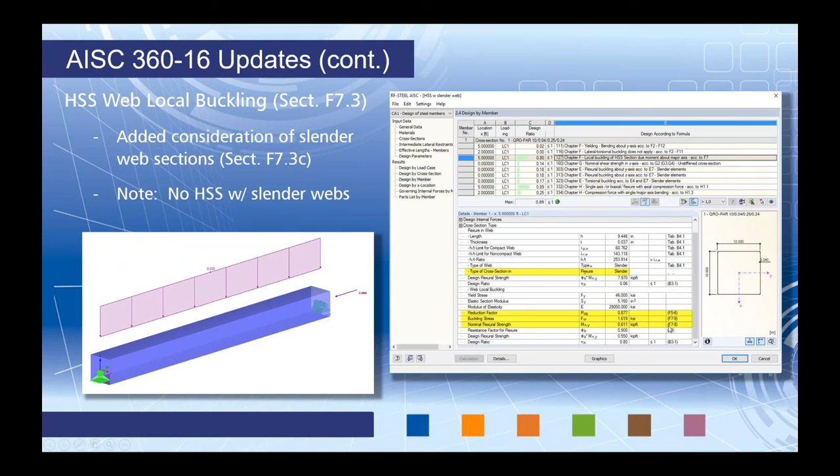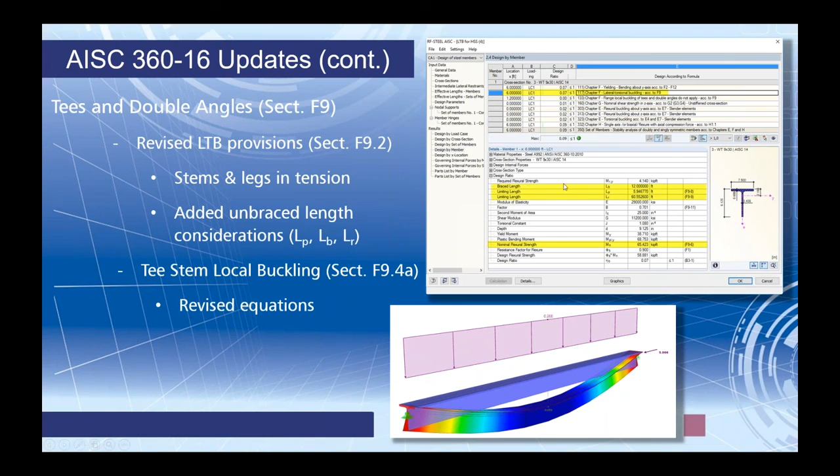Also, T-stem local buckling according to section F9.4a had some revised equations. So if you're running the 2010 versus 2016 in the module, you'll see slightly different results available there.

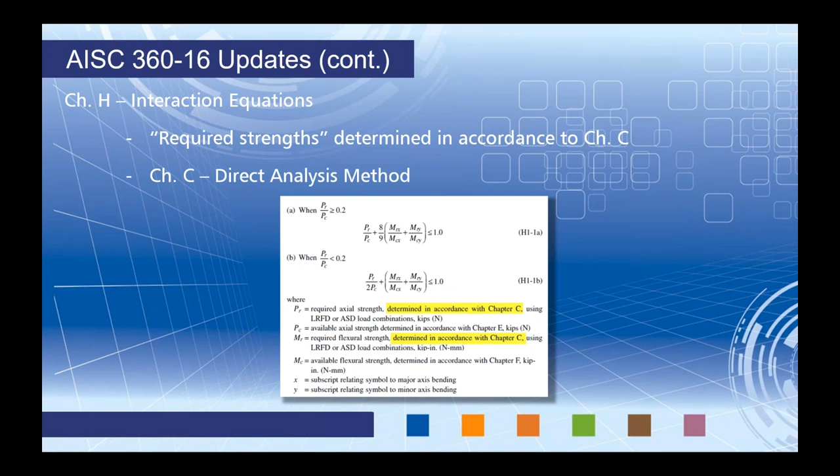Lastly, chapter H covers our interaction equations. It's noted that throughout this chapter there is reference to required strengths — you can see in my example, required axial strength, required flexural strength. After all these required strengths is the small note that they're determined in accordance with chapter C, our direct analysis method. I think this is a pretty big milestone. Previously, the direct analysis method was never really differentiated much from the effective length method, but now in the 2016 version, this really seems like the way AISC is pushing engineers to determine internal forces. That's why the previous webinar I did on the 2010 version, since realistically nothing changed within that chapter except for the small section on stiffness reduction, will be extremely useful, as this seems to be the direction AISC is headed.

Okay, so that concludes the webinar for today. I know that was an incredible amount of information at one time.